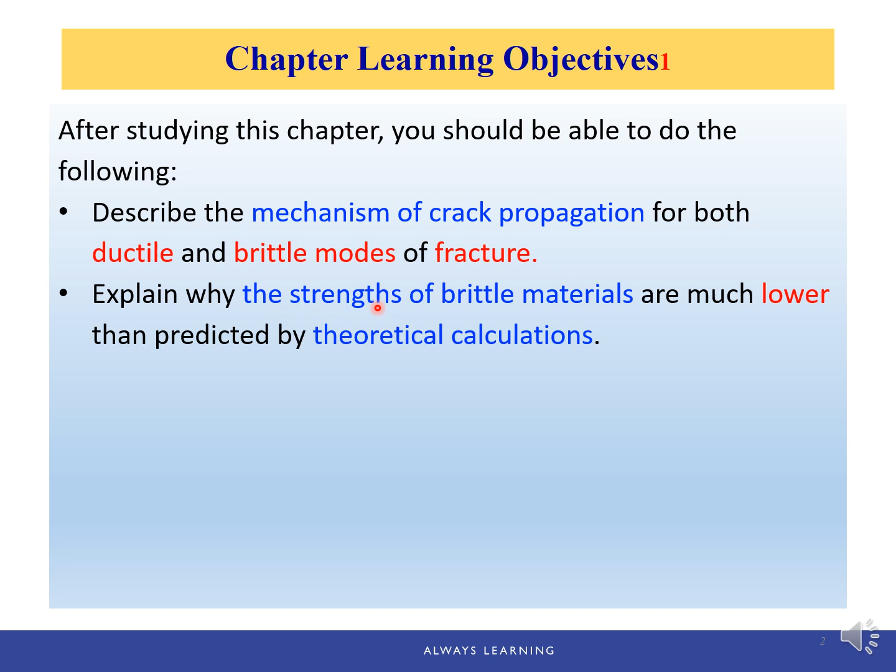After studying this chapter, you should be able to describe the mechanism of crack propagation for both ductile and brittle fractures, explain why the strength of brittle materials is much lower than predicted by theoretical calculations, and define fracture toughness in terms of a brief statement and an equation, including all the parameters in this equation and their proper units.

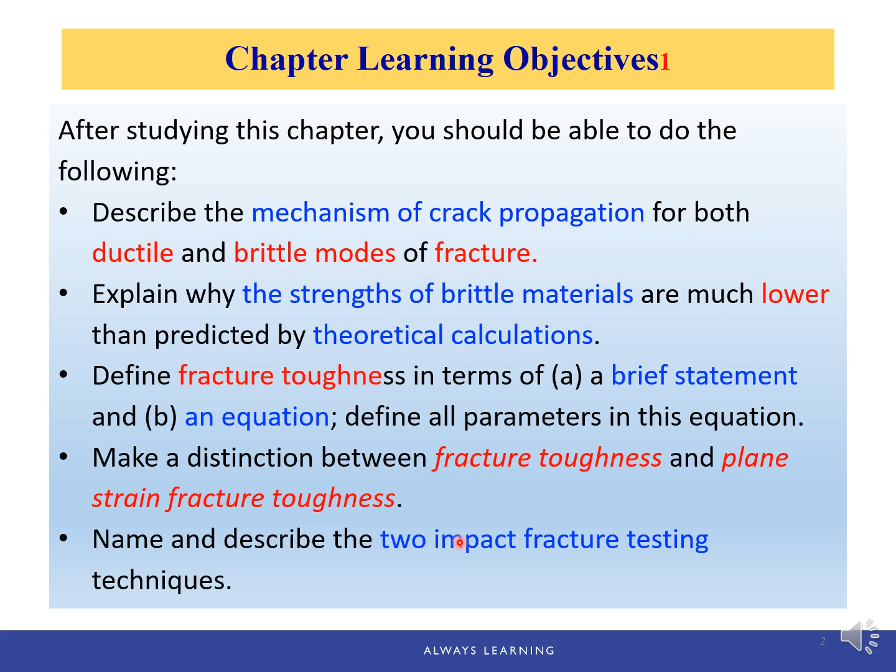Make a distinction between fracture toughness and plane strain fracture toughness, and name and describe the two impact fracture testing techniques.

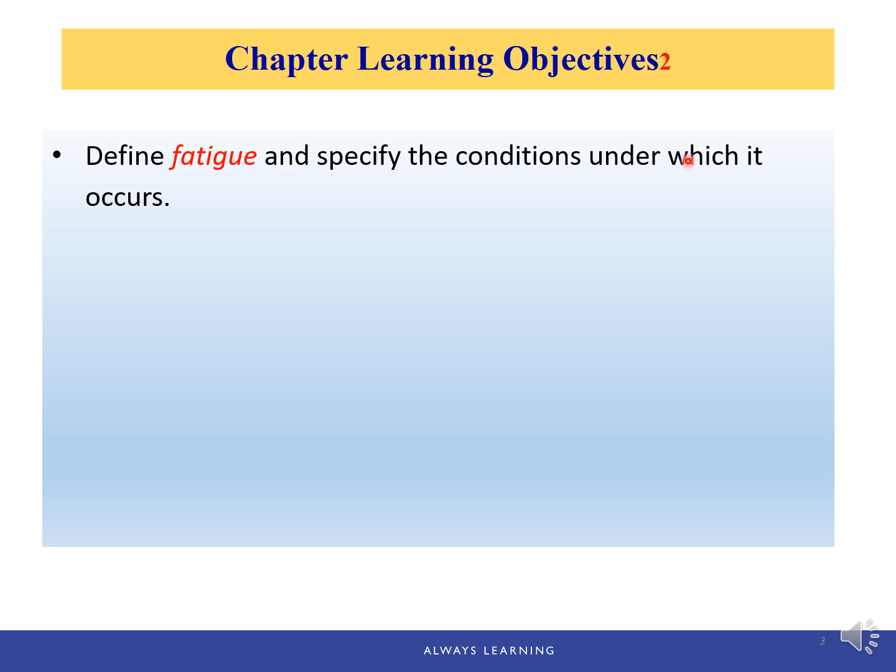Define fatigue and specify the conditions under which it occurs. From a fatigue plot for some material, determine the fatigue lifetime and the fatigue strength at a specified number of cycles.

Define creep and specify the conditions under which it occurs. Given a creep plot for some material, determine the steady-state creep rate and the rupture lifetime.

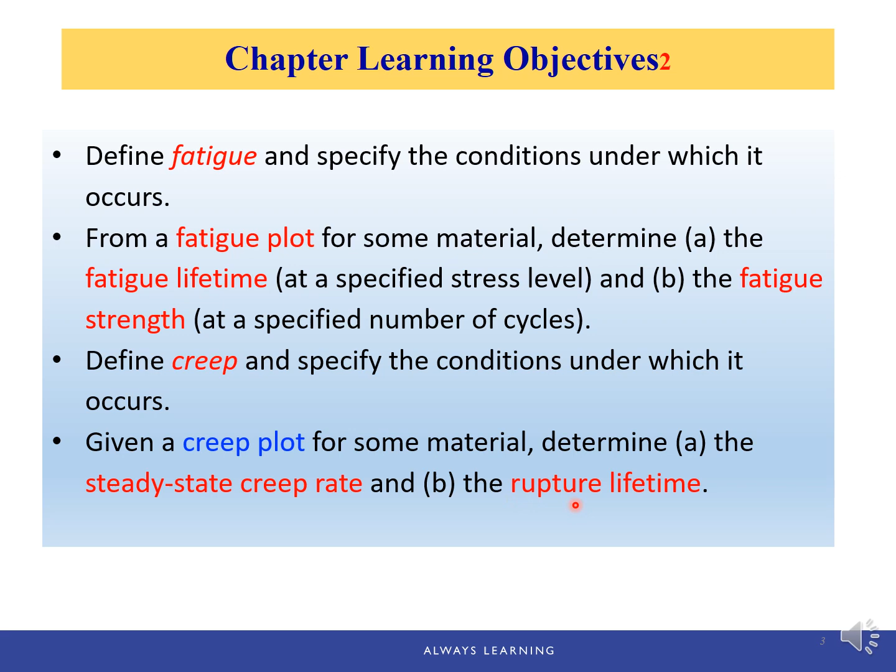Let's first take a look at some engineering failure examples to see why it is important to learn failure mechanisms. This is an oil tanker that fractured in a brittle manner as a result of the propagation of a crack completely around its girth.

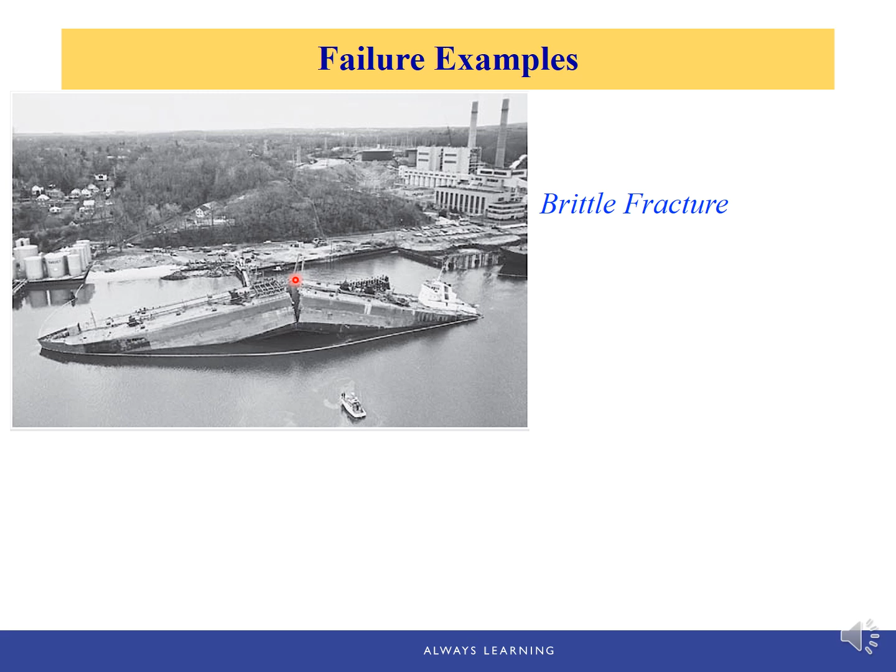Brittle fracture usually happens without warning. It just happens quickly, so there's no time to prevent the fracture from happening in this case.

Another example is a Boeing 737 commercial aircraft, which experienced an explosive decompression and structural failure on April 28, 1988. An investigation of the accident concluded that the cause was fatigue.

We're going to learn about fatigue and brittle fracture later in the lectures. But you can see that both failures are catastrophic.

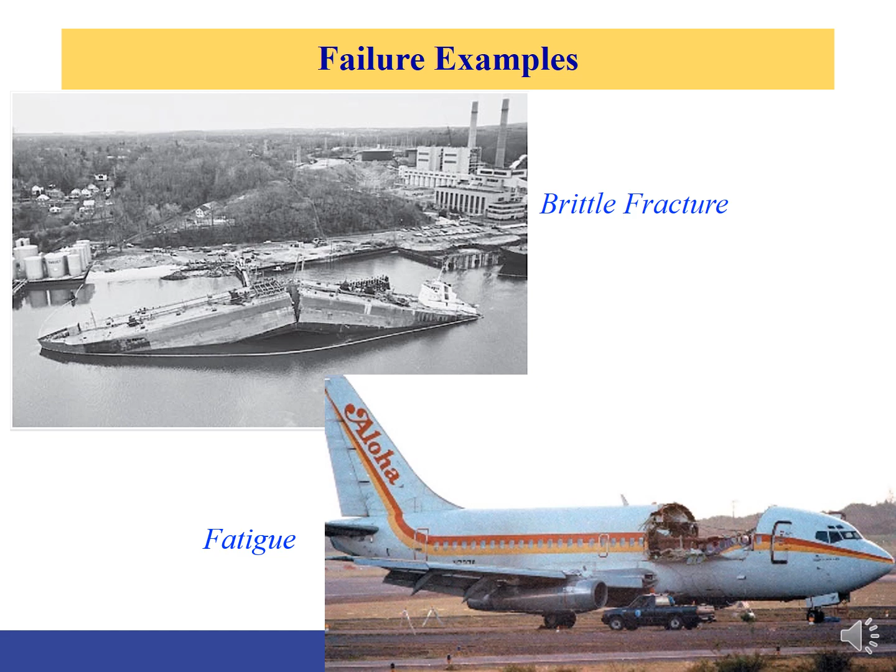The failure of engineering materials is almost always an undesirable event for several reasons. This includes putting human lives in jeopardy, causing economic losses, and interfering with the availability of products and services. Thus, it is important to understand the mechanics of the various failure modes.

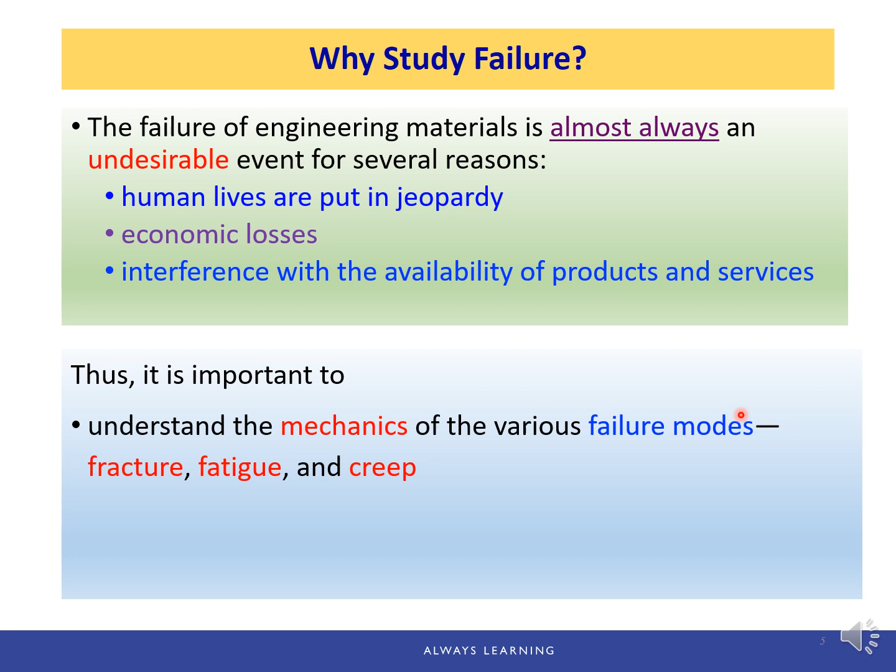In these lectures, we're going to talk about the three failure modes, including fracture, fatigue, and creep. It is important to be familiar with appropriate design principles that may be employed to prevent in-service failures.

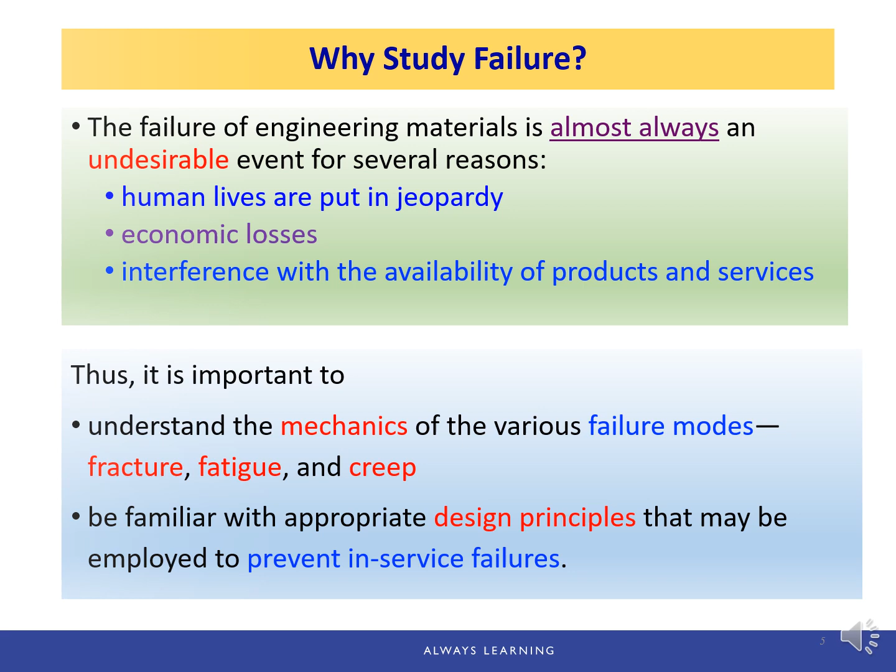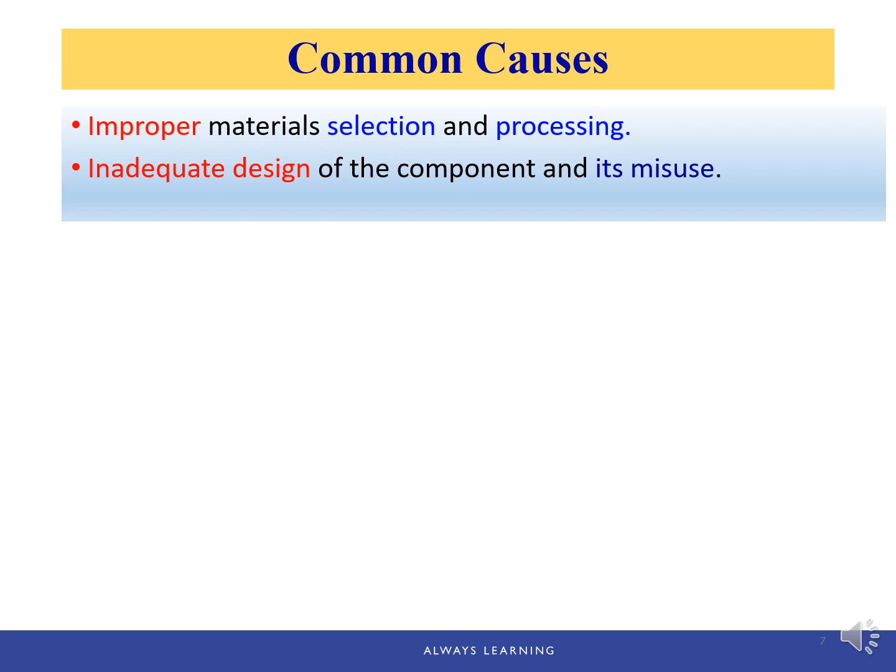We said that the failure of engineering materials is almost always, not always, an undesirable event, because the common causes of failure include improper material selection and processing, inadequate design of the component, and its misuse. The three failure modes that we're going to discuss in the following lectures include fracture, fatigue, and creep.

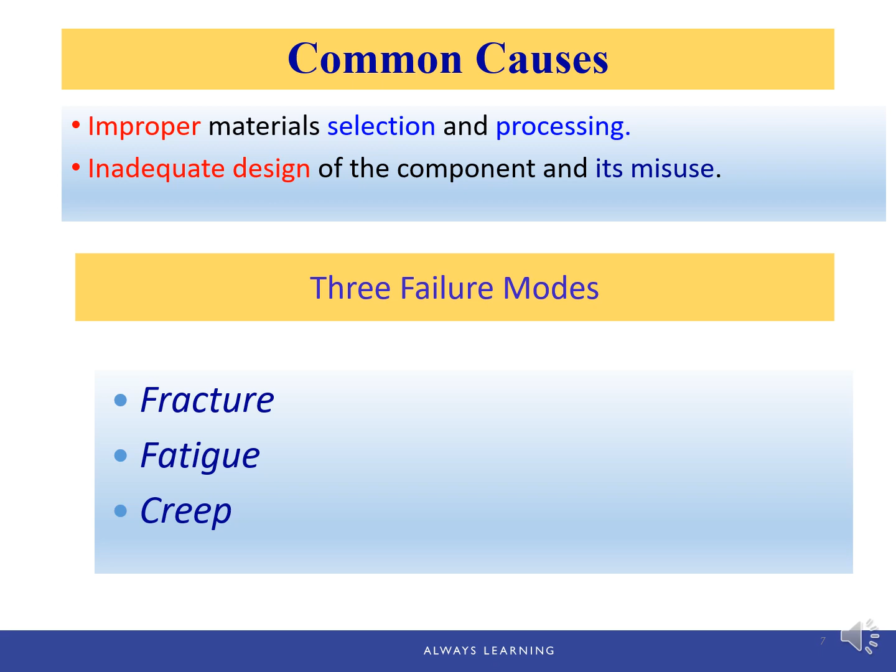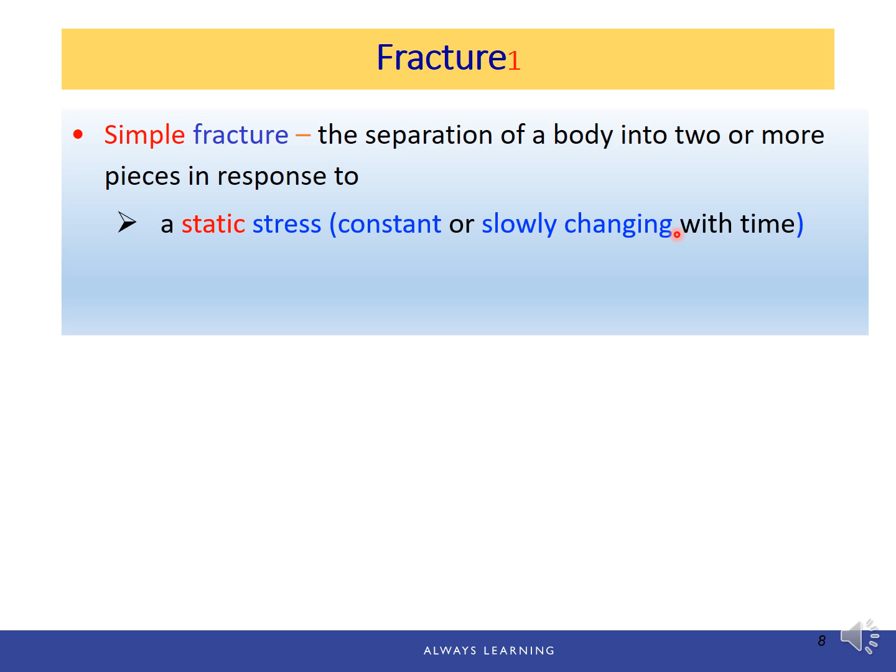Simple fracture is the separation of a body into two or more pieces in response to an imposed stress that is static, meaning it's constant or slowly changing with time, at temperatures that are low relative to the melting temperature of the material.

For metals, there are two fracture modes: ductile fracture and brittle fracture. The classification is based on the ability of the material to experience plastic deformation before the final fracture stage.

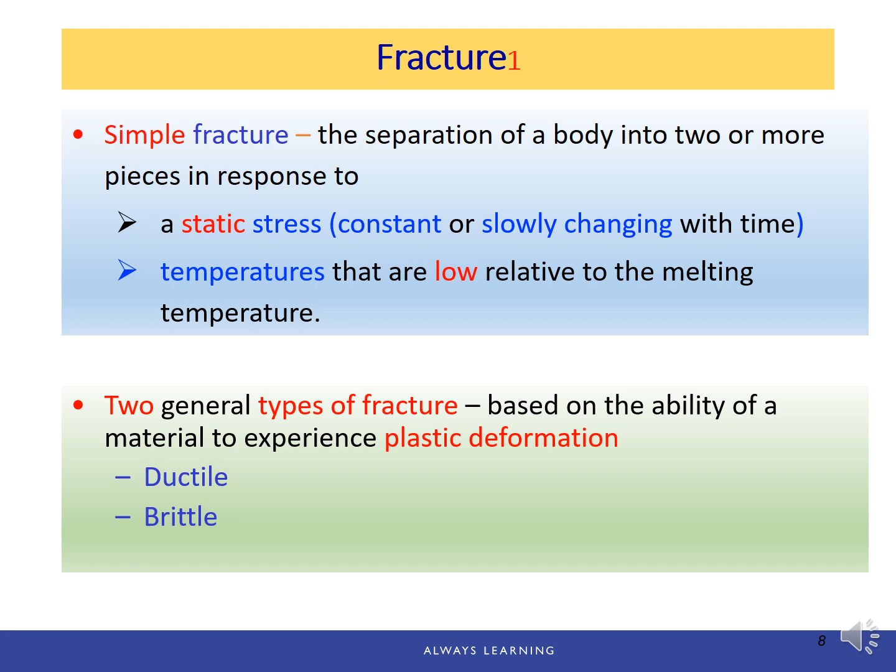Any fracture process involves two steps: crack formation and crack propagation in response to an imposed stress. We mentioned that there are two fracture modes, ductile and brittle. So ductile and brittle are actually relative terms; whether a particular fracture is one mode or the other depends on the situation.

Ductility may be quantified in terms of percent elongation and percent reduction in area. Furthermore, ductility is a function of temperature and the strain rate and the stress rate when a certain stress is applied. So therefore, we cannot simply say if the material is ductile, then the fracture is ductile, or if the material is brittle, the fracture is brittle.

Instead, the mode of fracture is highly dependent on the mechanism of crack propagation. For ductile fracture, the crack propagation is slow and it requires an increase in applied stress. Such a crack is often said to be stable, that is, it resists any further extension unless there is an increase in the applied stress.

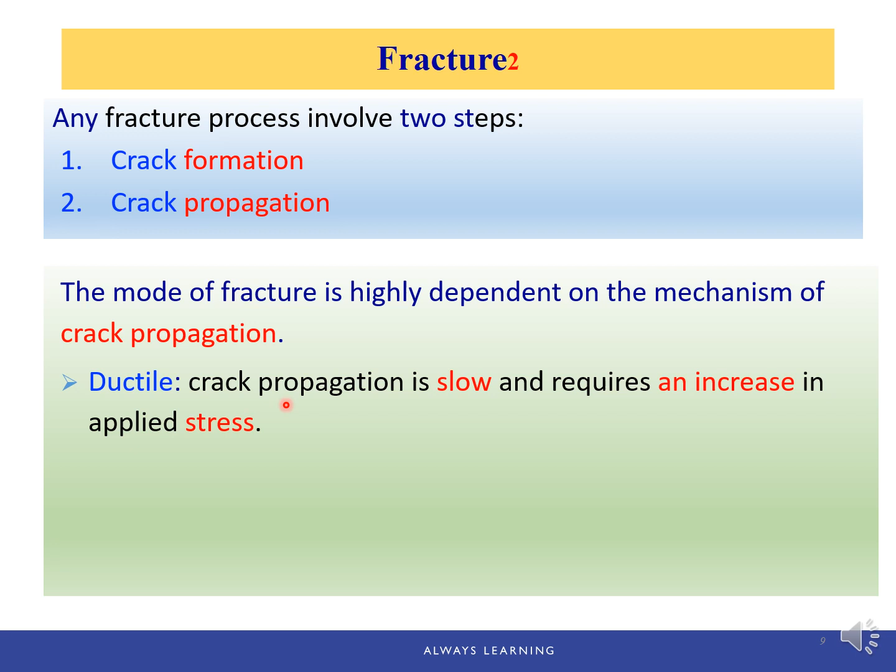On the other hand, the brittle fracture crack propagation is fast and continues spontaneously without an increase in applied stress.

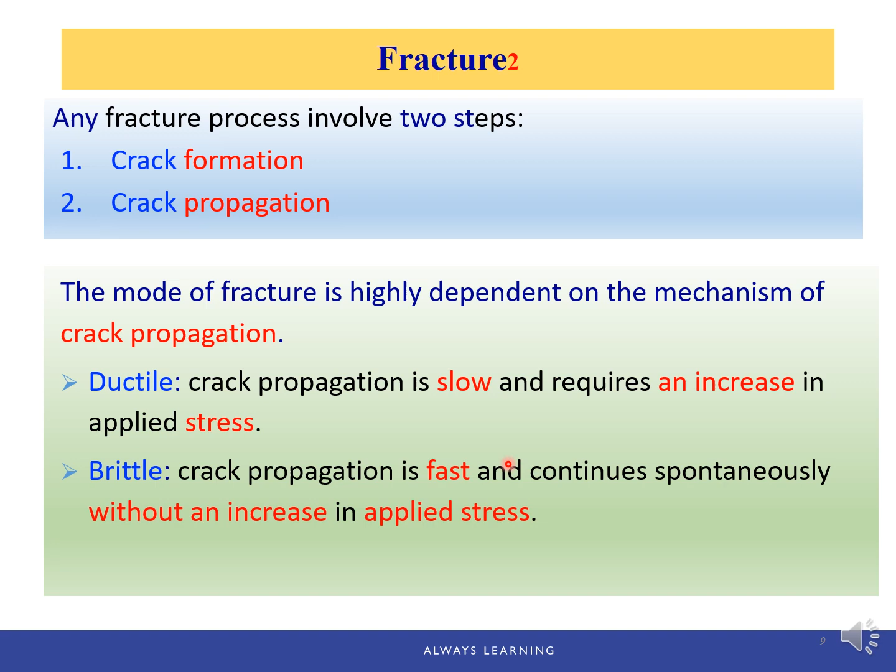In conclusion, for ductile fracture, it has slow crack propagation, accompanied by significant plastic deformation. It fails with warning. For brittle fracture, the crack propagation is rapid, with little or no plastic deformation, and it fails without warning.

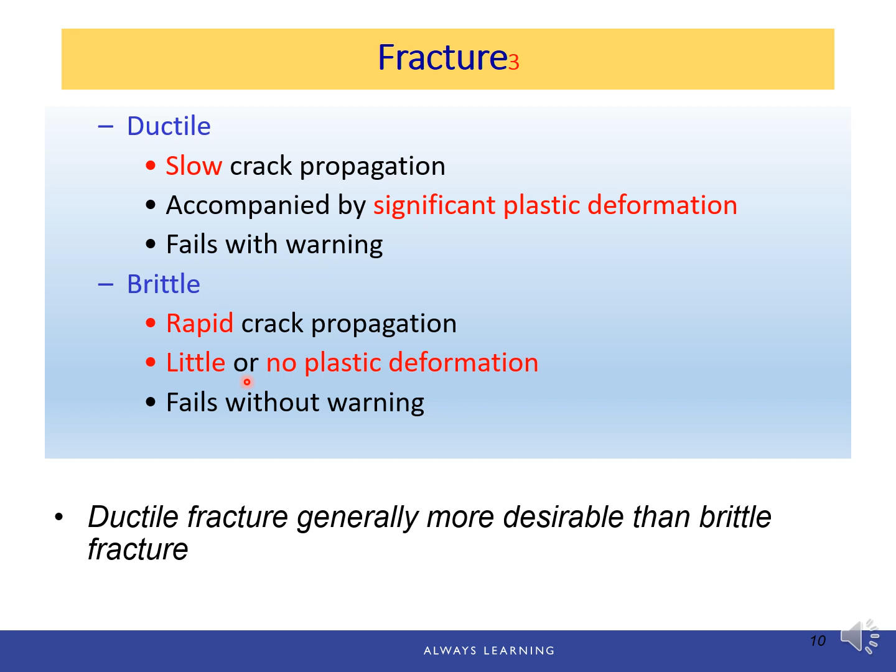So ductile fracture is almost always preferred over brittle fracture for two reasons. First, brittle fracture occurs suddenly and catastrophically without any warning, a consequence of the spontaneous and rapid crack propagation. On the other hand, for ductile fracture, the presence of plastic deformation gives warning that fracture is going to happen, which allows preventive measures to be taken.

Second, more strain energy, or more energy generally, is required to induce ductile fracture. So these materials are usually, or generally, tougher.

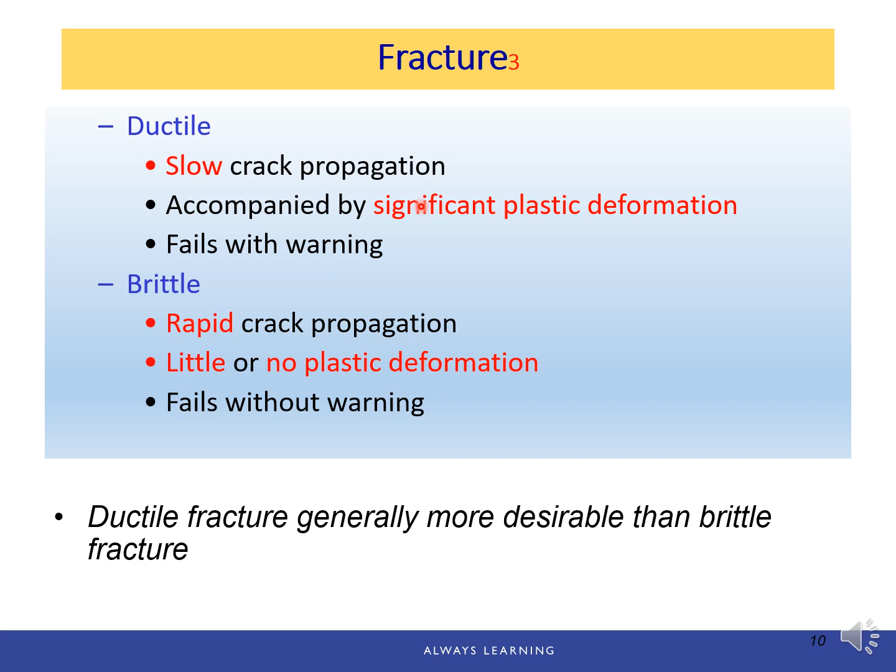Ductile fracture surfaces have distinctive features on both macroscopic and microscopic levels. The figures down here show schematic representations for two characteristic macroscopic fracture profiles, and also one brittle fracture profile.

The first configuration is found for extremely soft metals such as pure gold and lead at room temperature, and other metals, polymers, and inorganic glasses at elevated temperatures. These highly ductile materials neck down to a point fracture, showing virtually 100% reduction in area.

The most common type of tensile fracture profile for ductile materials is the second, where fracture is preceded by only a moderate amount of necking.

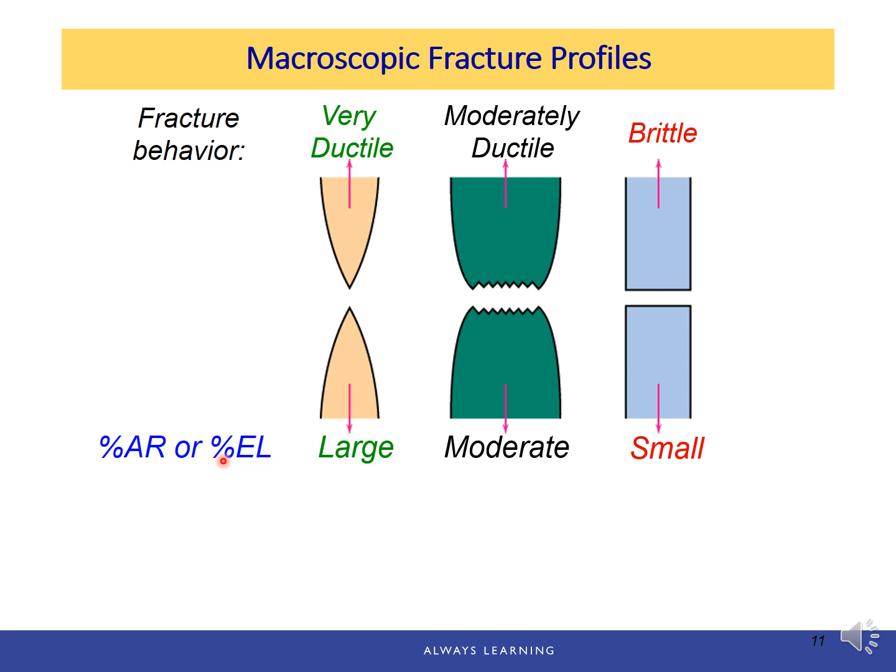In comparison, here is the fracture profile for brittle fracture. It has very small plastic deformation in terms of percentage area reduction and percent elongation. So again, ductile fracture is usually more desirable than brittle fracture because it has warning before fracture, whereas for brittle fracture there is no warning.

Sometimes we can tell which type of fracture by observing the fracture surface. For ductile fracture, it has a characteristic surface contour termed cup and cone fracture, because one of the matching surfaces is in the form of a cup and the other like a cone. This is indicative of plastic deformation. Whereas for brittle fracture, the fracture surface is very bright, shiny and smooth, with no or little plastic deformation.

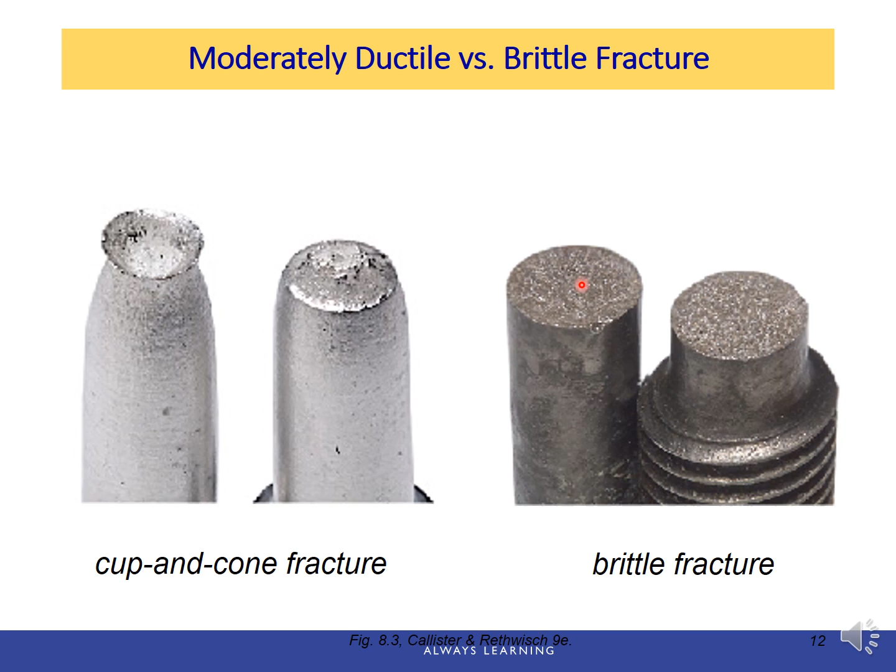Here's another example for pipe fracture, which gives us a very clear comparison between ductile and brittle fracture. Let's say the pipe might be the same type, and ductile fracture might happen in summer due to excessive forces, resulting in large deformation. It's just cracked open, but the pipe is still one piece.

On the bottom, which is the brittle fracture, the pipe breaks into many pieces. This might happen in winter where the temperature is very low, and the pipe, if made from polymer, becomes very brittle and breaks into pieces, but each piece has very small deformation.

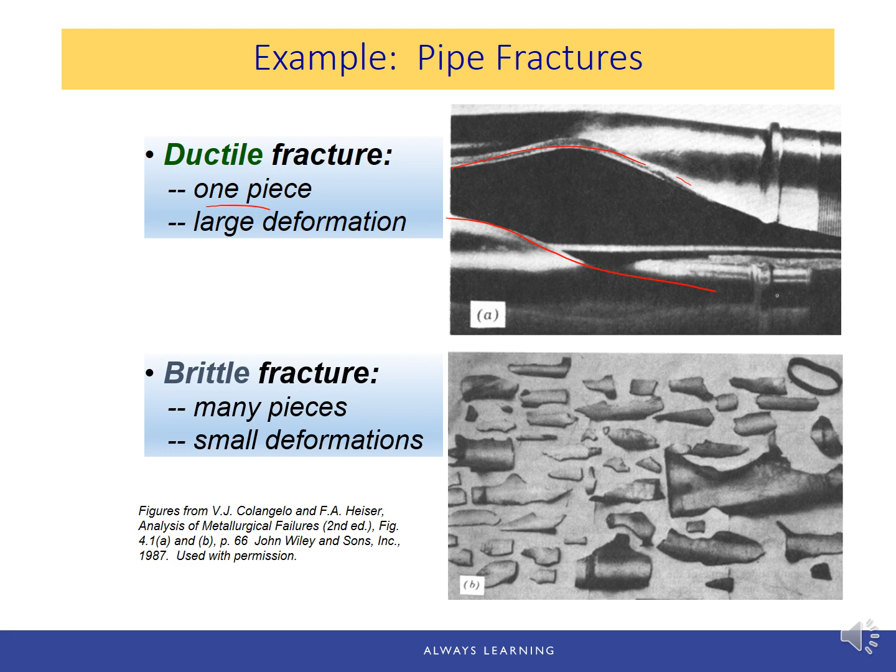Now we can compare ductile and brittle fractures from a macroscopic perspective. First, the deformation: ductile fracture has extensive plastic deformation, whereas brittle fracture has little or none. For ductile, crack propagation is slow and needs increased stress for the crack to grow. For brittle, crack propagation is fast, continuing spontaneously without increasing stress.

As for type of materials, most metals will have ductile fracture at a temperature that is not too cold. Brittle fracture usually happens in ceramics or cold metals. Ductile fracture gives some warning because of the permanent elongation or extensive plastic deformation, but brittle fracture has no warning before it happens. For strain energy, because of the plastic deformation, ductile fracture requires a large amount of strain energy, whereas for brittle it's lower.

The fracture surface for ductile fracture is rough, with the characteristic cup and cone fracture surface, but for brittle fracture it's smoother, with no or very little plastic deformation. Ductile fracture experiences the necking phenomenon, but for brittle fracture there is no neck formed at the fracture surface.

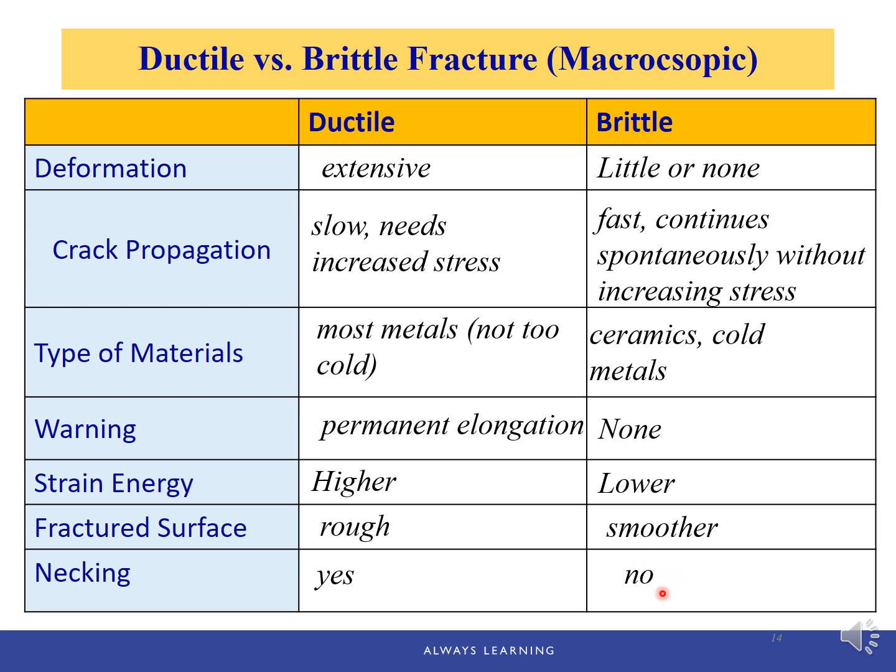So how did the ductile fracture happen? What is the fracture process during ductile fracture? We're going to use moderate ductile fracture as an example to explain the fracture stages. For a specimen under tensile test, first after necking, small cavities or micro voids start to form in the interior of the cross section.

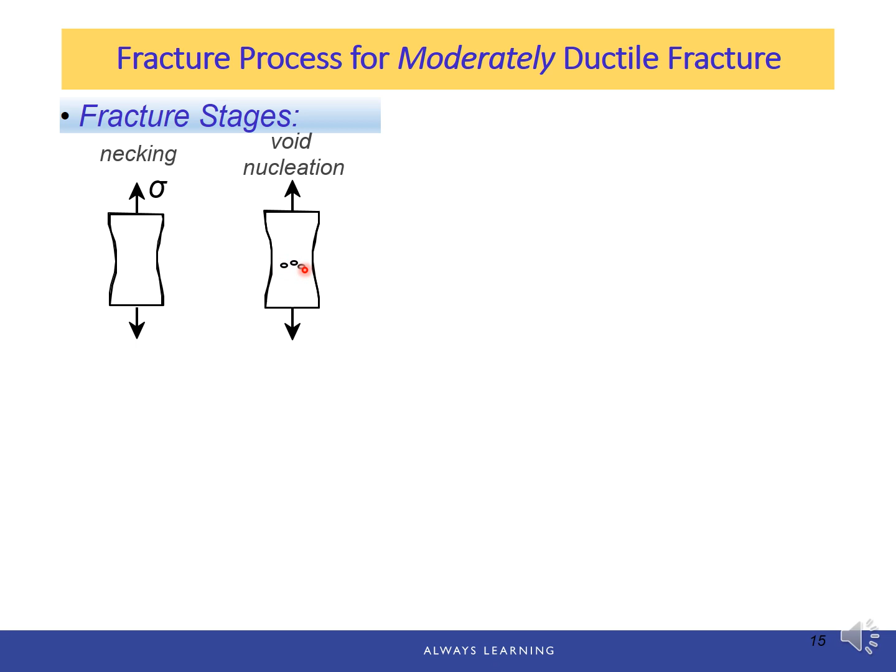Next, as deformation continues, these micro voids enlarge, come together, and coalesce to form a larger crack, which has its long axis perpendicular to the stress direction. So this is the stress direction along the axial direction, and this is the long axis of the crack, so they are perpendicular to each other.

The crack continues to grow in the direction parallel to its major axis by the microvoid coalescence process, because more microvoids join in this direction. Finally, fracture happens by rapid propagation of a crack around the outer perimeter of the neck by shear deformation at an angle of 45 degrees with the tensile axis, because this angle is where the maximum shear stress happens.

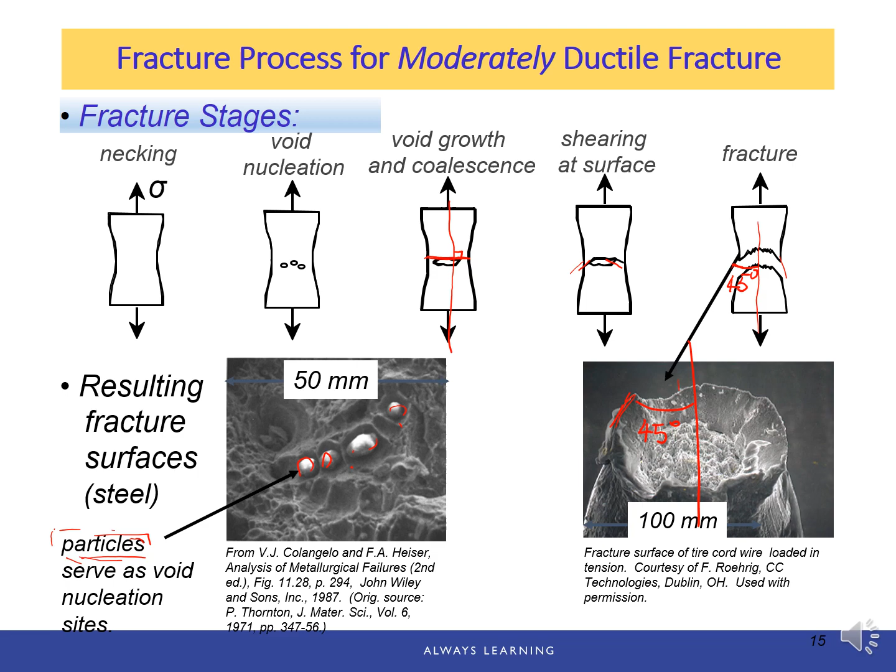And here is the cup and cone feature from the ductile fracture, again at an angle of about 45 degrees with the tensile stress. Also, microvoids usually happen around particles, left during the solidification process when making the materials - some inclusions or impurities left in the material. Those particles serve as void nucleation sites, and voids start to form around them, growing to a bigger crack and finally becoming the fracture.

At microscopic level, ductile fracture normally occurs in transgranular fashion and creates dimples on the fracture surface. Transgranular fashion means the fracture cracks pass through the grains - not along the grain boundaries, but actually through different grains. This is the transgranular fashion, or transgranular crack growth.

Dimples are formed on the crack surface, and there are two types. One is equiaxed dimples, formed at the places where micro cracks form. Another type is called elongated dimples, formed on the shear lip because of plastic deformation, and they point towards the origin of the failure.

By the way, the dimples are better studied using SEM, which is scanning electron microscopy, which has better resolution and depth of field than the optical microscope.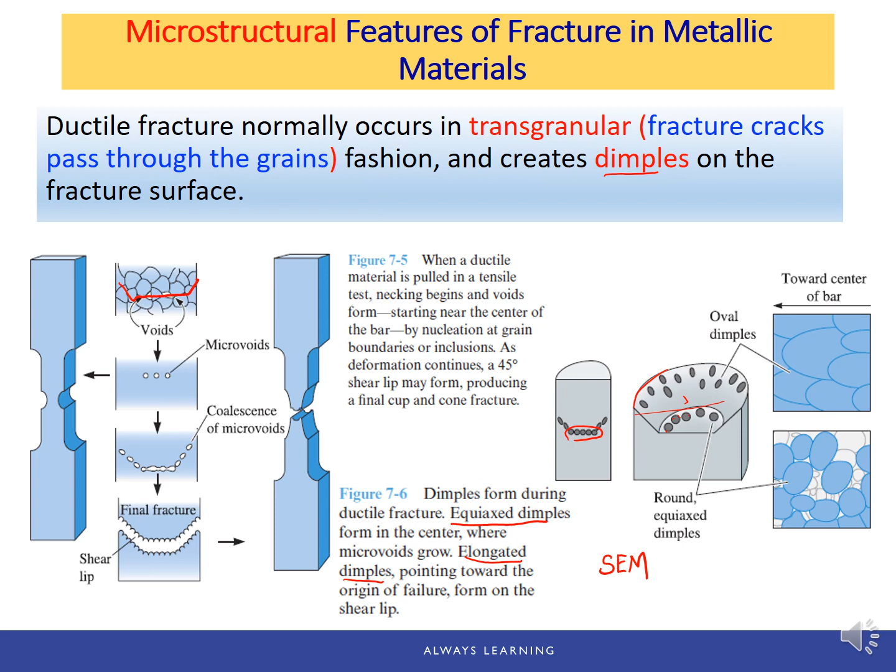Brittle fracture takes place with little to no plastic deformation and by rapid crack propagation. The direction of crack motion is very nearly perpendicular to the direction of the applied tensile stress and yields a relatively flat fracture surface.

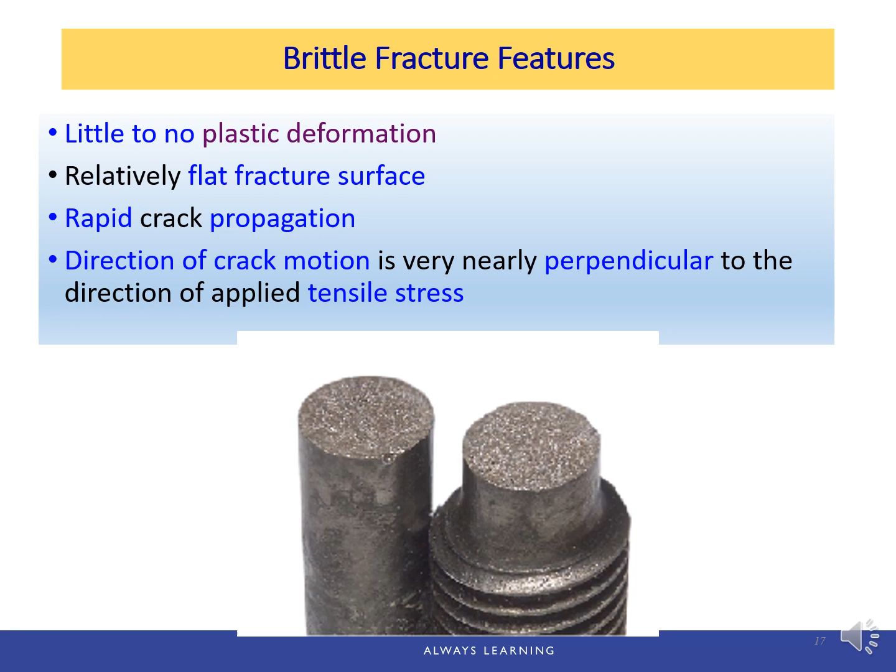Fracture surfaces of materials that fail in a brittle manner have distinctive patterns. For example, they don't have any or very little plastic deformation. In addition, in some steel pieces, a series of V-shaped chevron markings may form near the center of the fracture cross-section that point back to the crack initiation site.

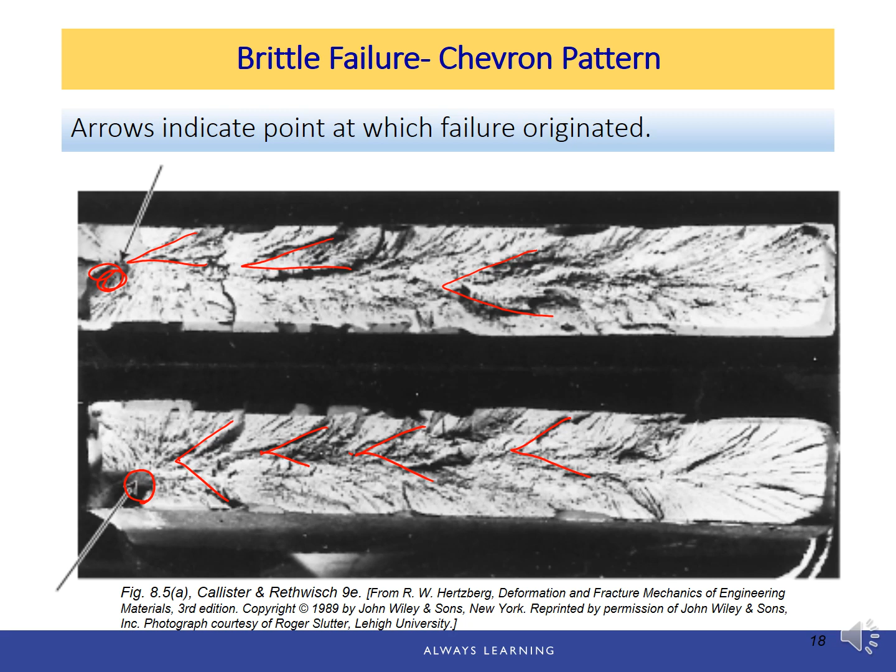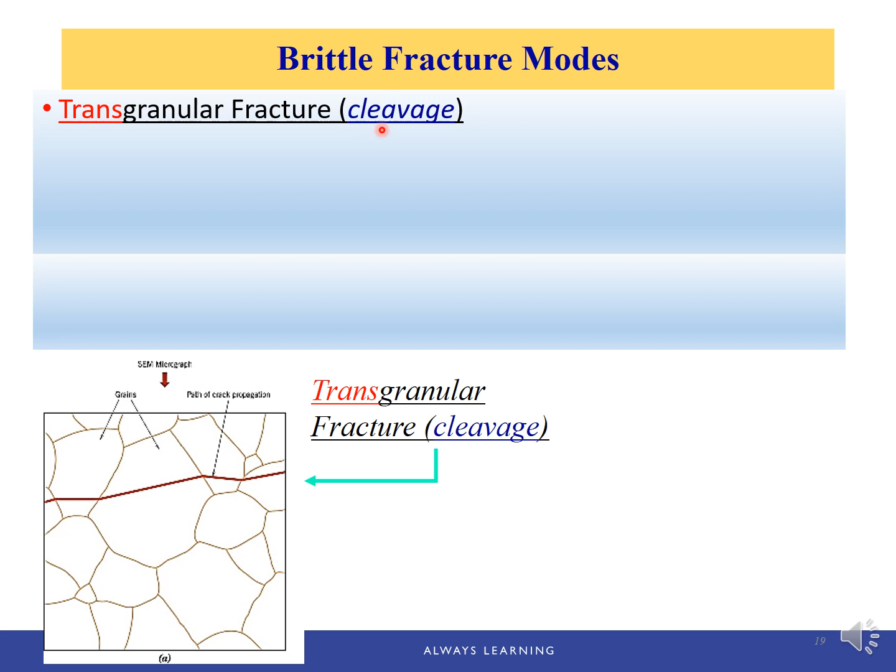From a microscopic level, brittle fracture has two modes. The first type is transgranular fracture, or cleavage. For transgranular fracture, the crack propagation path corresponds to breaking of atomic bonds along specific crystallographic planes, and this fracture, or the cracks, pass through the grains - it doesn't go around the grain boundaries, but passes through the grains.

For some other materials, the brittle fracture happens intergranularly. That means the crack propagation is along the grain boundaries, and this is termed intergranular fracture.